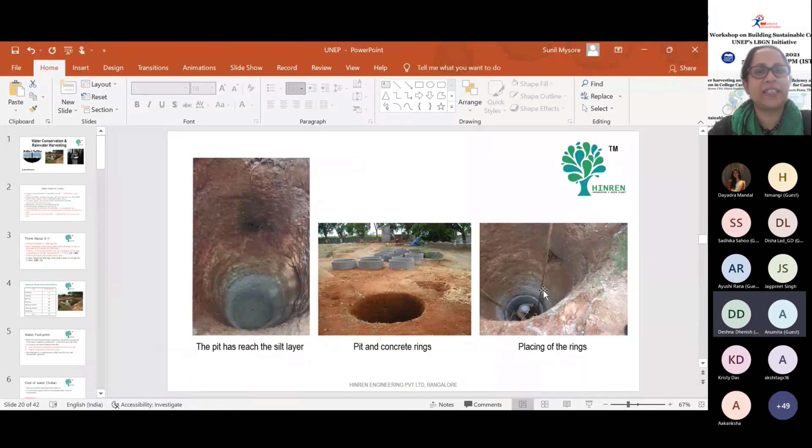So bear with me till I share the presentation. I don't know how this works, but yeah, are you able to see my screen? Are you able to see my screen? Yes, yes, we are able to see it.

Okay, thank you. So I was given the topic of rainwater harvesting and water conservation. Well, they're actually two very different topics. So let me see how I can merge them, because with rainwater harvesting we are talking mostly from the supply side, how we can augment the supply of water. But it is not enough to just talk about the supply. Most important in today's scenario is actually the demand.

How we can become more efficient, how we can conserve water, what we can do to use less water, what we can do predominantly to consume less, because there is inherent water in everything we consume. So we will talk about both in the given space, and after this, any questions or topics we can discuss further, we will definitely do it. So we will talk on both water conservation and rainwater harvesting.

So we will now see why exactly we will talk about these two things. We have to first understand the scenario. If you are talking about 25 years back, rainwater harvesting as a term was not this popular. We used to have some terminologies here and there, but this whole narrative about rainwater harvesting wasn't there 20-25 years back. So what we have done in the last 25 years is most important.

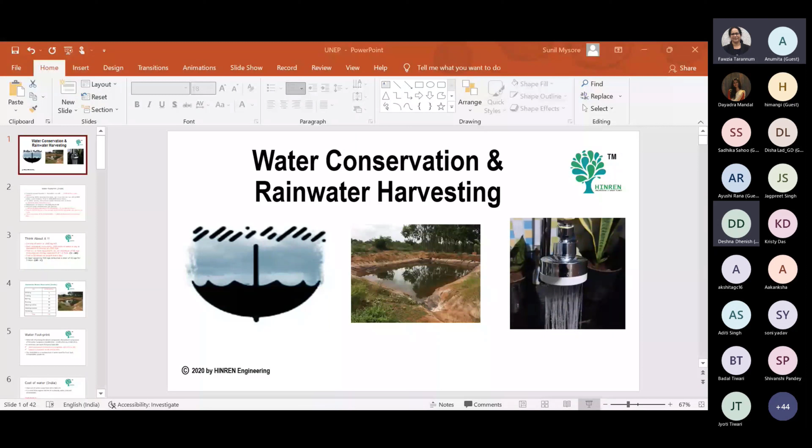So if you have a population of 1.3... Sunil, are you changing your slides? Because we are not able to see. No, I'm not changing. It's still here. I'll request you to put it on slideshow. It is in slideshow, right? To us, it's not showing slideshow. For me, it's full screen. It's visible, so you may continue. Is there any other way of sharing? Just on your toolbar, see slideshow. Oh, I think I just lost it. It's gone. Entire screen. How about now? Yes, it is visible. It's perfect now. Good. Thank you.

So I was talking about the net endowment of water that we get in the country. It is pretty much the same from the time we started recording data. So if we crystallize this further, what can each person in the country get? If you divide it for academic interest, we are getting 1,600 billion cubic meters, out of which 50% goes to the seas. What translates is about 6,15,300 liters of water endowment per person. Per day, divided by 365, everybody in India can technically get 1,600 liters of water.

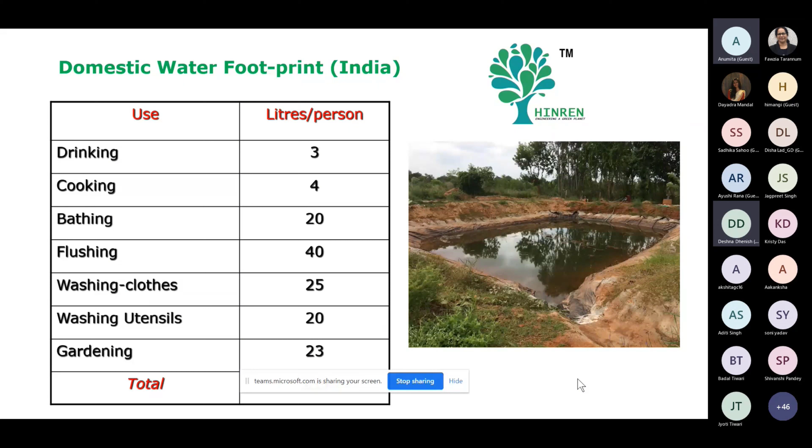So the point I wanted to make here is that the 135 liters we consume every day is hardly about 8, 9, 10% of our total water consumption. Of course, we have to conserve here as well. Plus, we have to largely conserve on our indirect water consumption, like our consumption pattern, food, travel, and other conspicuous consumption we are involved in. There are really two things. Rainwater harvesting is one. Water conservation is completely different. Though they are connected, conservation plays a very important role. Water conservation is not just switching off the tap, but changing to a more sustainable kind of consumption.

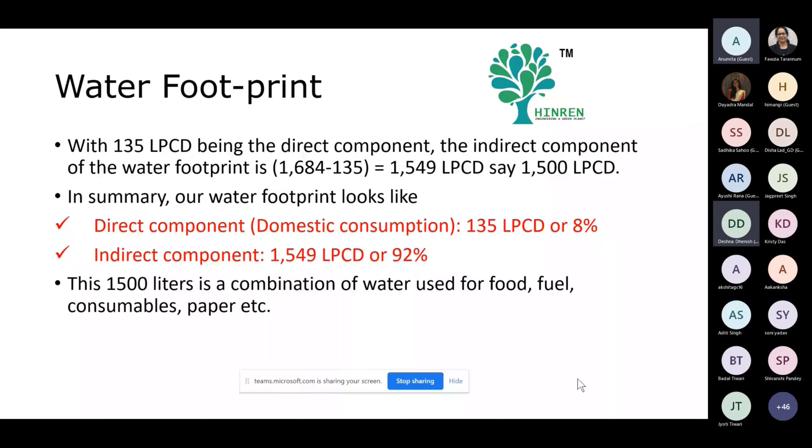I don't want to go more into water because all of us know what the cost of water is. The water in India is extremely subsidized. Most people don't even earn as much as the cost of water is. If you take it at 126 rupees, so many people don't even earn 126 rupees. So the water we get from municipal supply is heavily subsidized. It's far lower than the true cost of water.

So again, we come back to the two definitions, rainwater harvesting and water conservation. Rainwater harvesting is largely a supply side issue. We are trying to augment the supply, to catch the water which falls on the roof and divert it into rain barrels, underground tanks or recharge structures. Water conservation, again, you can divide into two parts. One is switching to far more efficient water consumption in households, using aerators, better taps, better showers and water efficient devices. That is for our conspicuous 135 liters consumption.

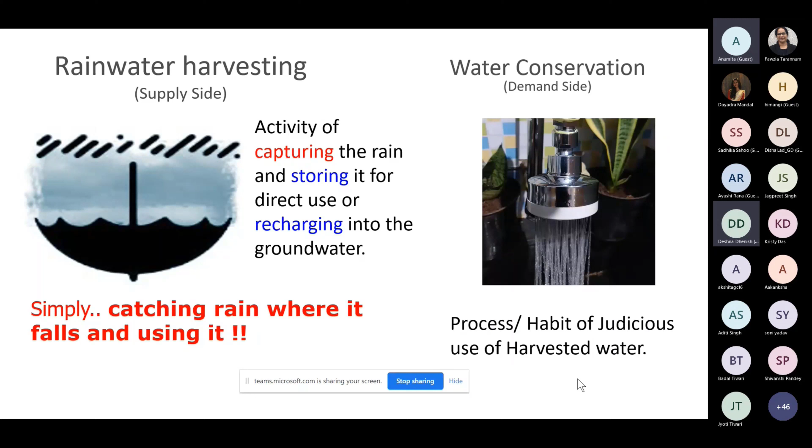The second part of water conservation is a change in lifestyle itself, converting to a more sustainable, less energy consuming lifestyle, like biking or using less paper and so on. We can talk a lot about it; we can have a separate session on sustainable lifestyles. So these are the two points I wanted to make. Now we will come to rainwater harvesting per se. Why do we talk about decentralization?

All of us people staying in Delhi will know water is coming from about 30-40 kilometers away from the Jamuna basin. People in Bangalore will know we are getting Kaveri, which is easily 120 kilometers away and 500 meters deep. So there's so much conveyance, so much energy used in conveying the water, so much wear and tear of the pipe, so much infrastructure required, so much land required in conveying the water. So decentralization is one of the mantras.

So I've just given you a case study for the city of Bangalore, a city of 710 square kilometers receiving about 950 mm. This year we have crossed 1100 mm, by the way, and still counting. It rained yesterday. Even December 15th, we had rain in Bangalore. So total runoff, even assuming 50% goes, it's such a big number. With a population of a little more than 1 crore, 208 days of the water requirement of the city of Bangalore can be met by just the rainwater falling on the city. You don't have to go beyond that.

See, people coming from Bangalore or southern India will know there's a big history to Bangalore's water. We went going far, now we are at 120 kilometers, and now we are talking about the next source of water, the river Sharavati, which is 300 kilometers away. So a good part of the city's demand can be met by rainwater. This is the point I wanted to stress.

See, our city planners are mostly concerned about the water falling far away. It's falling in Kodagu or Coorg, which is 300 kilometers away. That is the catchment area for the city of Bangalore. We are not addressing the catchment of the city itself. So the city itself can give you a large portion of the water.

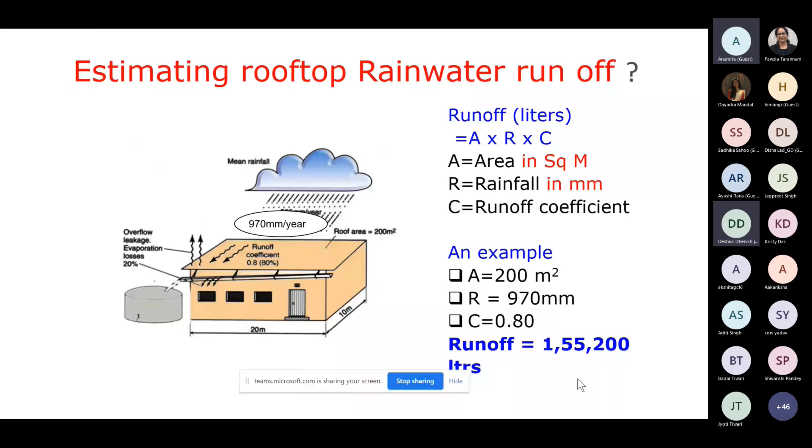Okay, so I happened to see this green nudges document which was shared with me. So I have also shared my own nudges. I have been writing about this, what are the small initiatives that one can do to actually make your life more and more sustainable. It's a 3-part series. I've actually completed 2 parts. The 3rd part is pending. So these are the links.

You can read through the very, very small nudges, like what can be done, like painting the roof white, changing your water tap to a low flow water tap, and shunning away the RO. So there are small nudges that one can actually implement to become a little more sustainable than how you are. So it has to be a step-by-step process. You can't just say, okay, at once I'll start and do this or do that.

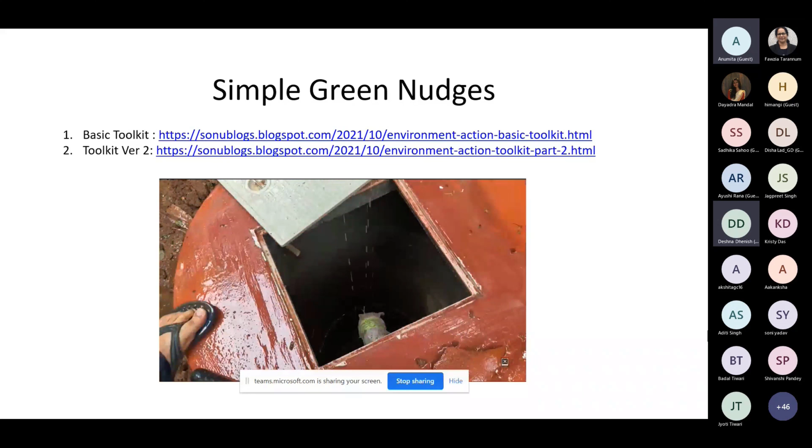You can see this is the rainwater being harvested, getting right into our underground sump. In case the water overflows from the tank, that goes into this recharge well and augments the groundwater. We can also open the first rain separator so that the first rain water also gets into this well. I'll just show it to you now.

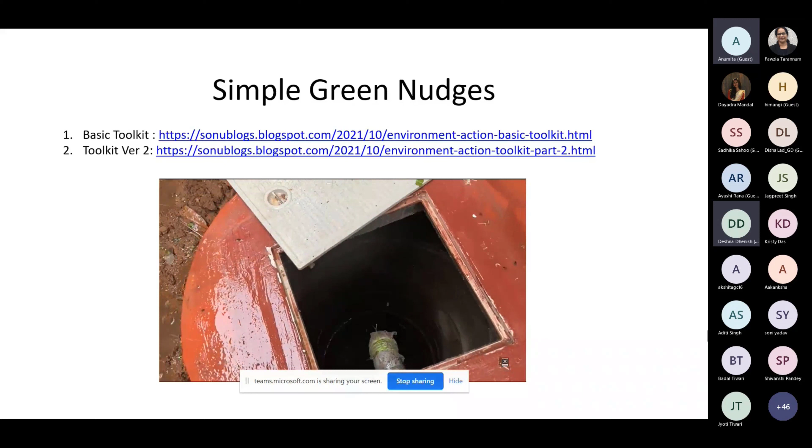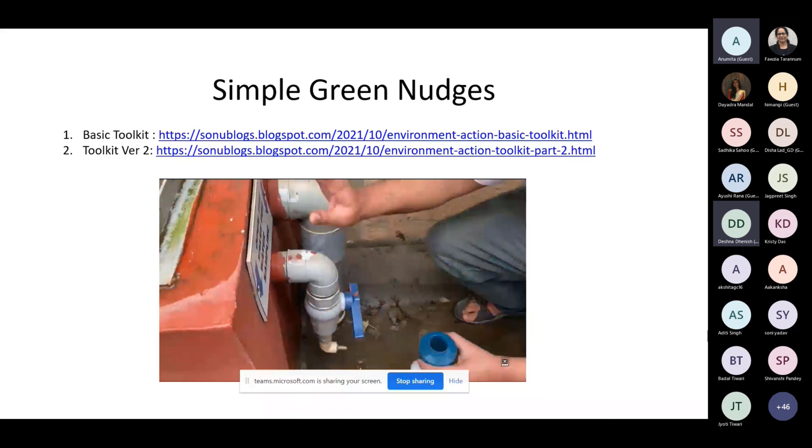Now the rains have stopped. This is the filter. Some water is standing here. So this is a valve. This is given to sample the water. If I open this valve, I can collect the water for sampling. So this is the rainwater filtered water. I can collect the water from this valve and send the water for testing. This is an upflow filter. There is some water standing here, and we will show another valve here.

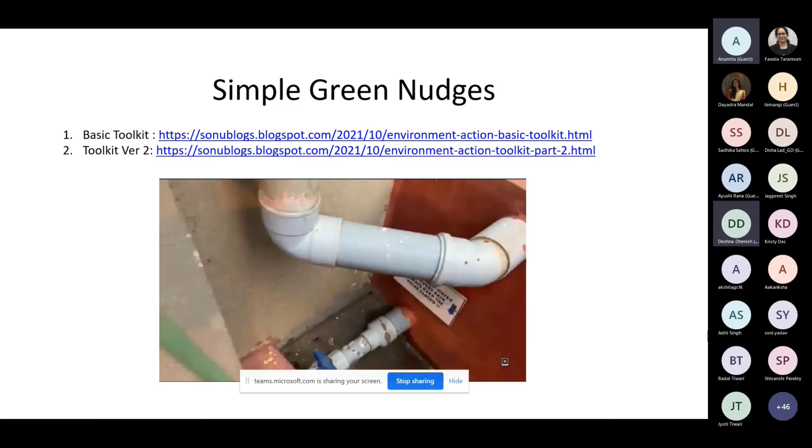This is another valve on this side. So here, this valve, if we open this valve, is going to backwash the filter. So after every rain, this can be opened, and the water standing in the filter will automatically backwash all the filter media, and the water will go out. This water we can use for floor swabbing or floor cleaning or any other non-potable use.

You can come here and see this is the water standing here. Now I will open the valve. You can observe what happens. See, now I have opened the valve. So this is the water getting backwashed. You can come here and have a look. Now all the water is going down from the filter. So all the water now has gone out, and now the filter is empty to receive the next rain.

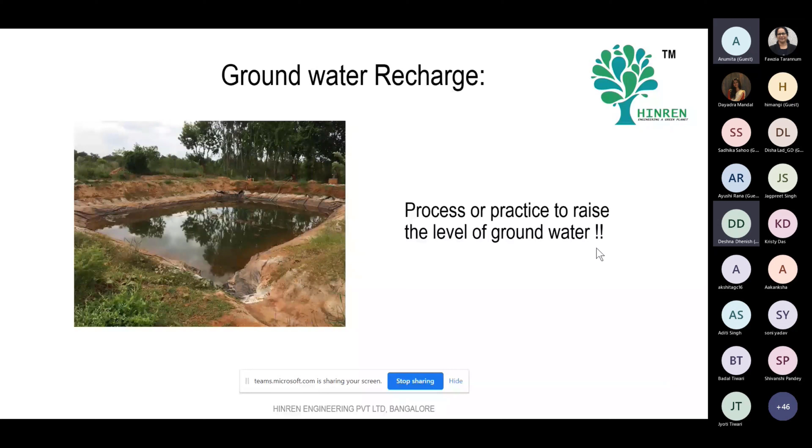For large campuses, for example, if you're talking about 700 acres, 500 acres, mostly it's open areas, either roads or gardens or pavements, where groundwater recharge is actually extremely important. So I will talk a little bit of this groundwater recharge and also talk about the economics. A lot of times, when I am talking to people, customers, academia, they all ask, what is the cost? How much can we save? Is it worth it? Why isn't the government doing it? So let me try to address a few of these as much as I possibly can in the limited time.

So now, as I told you, there are many ways you can do groundwater recharge. Most important, if you consume less, you are actually saving some other part of the groundwater or the fresh water. So plant trees, make trenches, recharge wells, stormwater infiltration wells, lakes, so on and so forth. Other than consuming less, we'll just talk about groundwater recharge in terms of how you make a trench and leave the water inside, and what actually happens after that.

So generally this is the geology in Bangalore or most of the Deccan Plateau. Mostly what we are doing is we put borewells and try to extract water from very deep strata. Generally in Bangalore, yesterday I saw a borewell of 1,700 feet. More than 1,000 has become very, very common. So this is a very approximate and very generalistic geology I've tried to draw.

But our point of interest is this: before 1967, there was no concept of borewell. The UNICEF guys got this borewell to India for a very short duration of time. They said this can give you water in certain parts, go deeper and get the water. But now the borewell and this borewell machine became a way of life. Now everywhere you see borewell machines.

So 40 years back, nobody had heard of a term called borewell. It was very, very rare. Mostly people used to think about a recharge well or a withdrawal well, which is not more than 30, 40 feet deep. So essentially what I'm trying to tell you is, you can look at these as perhaps a withdrawal well. If not, you can look at it as a recharge well as well.

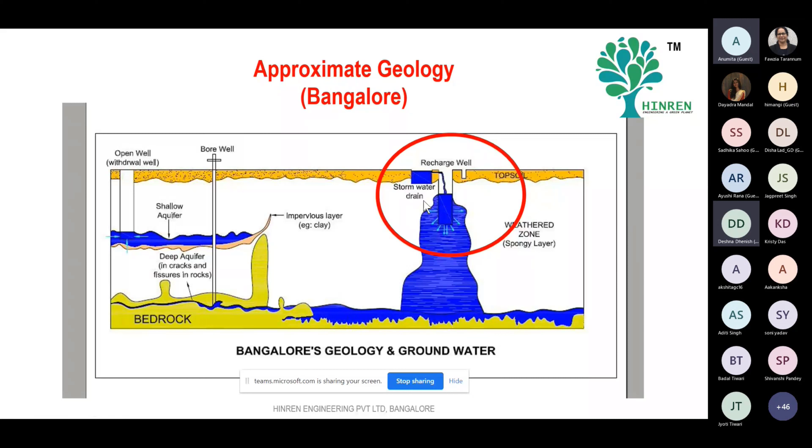Okay, so this is the approximate geology I wanted to talk about, so that you get an idea of where you can actually source or even where you can put the water for future use. So a small technical detail. See, this is roughly our earth surface, and we have a recharge well or a withdrawal well. This is our surface, and we are sinking a small cavity here.

So most of the water we see in the traditional open wells, people in Delhi, the older folks may appreciate, there was this Agrasen Ki Bawli near Connaught Place, where I was told there was water. The time when I went there, there was no water. I thought it is just an architectural feature for people to come and take selfies, but then I was told up till the 1980s there was water there. I'm talking about this water. It's unconfined water, sweet water, by and large free from any kind of contamination.

And that area of influence is so small that any recharge here can actually make this water yield here. Compare that with the confined aquifer, which is between two confining layers. Generally, this will be shale or clay or quartz, some kind of geological formation, and the water will be here, under pressure. So when you're drawing water, the water will come under pressure, but you're also talking about a lot of other chemical contamination which can come with that, and which also needs a very high inherent energy to actually suck that water.

And mostly the recharge area or the source of this water will be very, very far from the point where we actually extract this water. So there are two real kinds of structure. The recharge or withdrawal structure we are talking about is very shallow, 20, 30, 40 feet, and the confined aquifer or the deep borewell, which mostly in the Deccan Plateau has crossed 1,000 feet now.

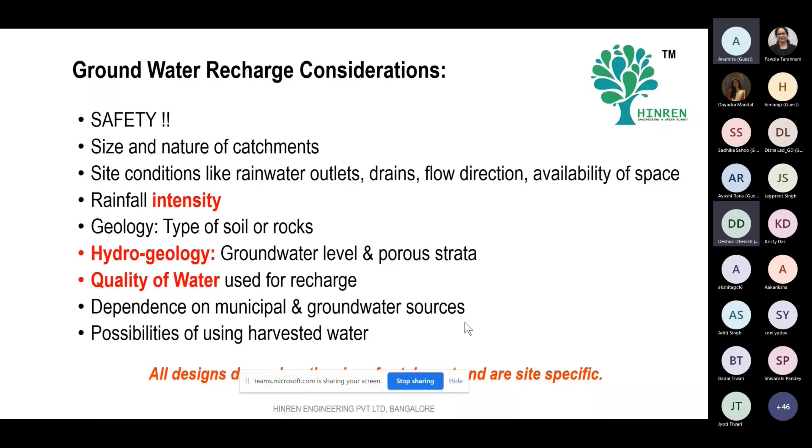Okay, so I'll not get into the hydrogeology and other engineering considerations, but what I wanted to tell is these are the structures which can be used for putting the water back into the soil. So a little bit of technical stuff. Essentially, it's just an open cavity. They're using the hydrostatic pressure, mostly governed by the depth or the height, which makes the water go into the soil layers and augment the groundwater.

So you can pick up any kind of water, rooftop, roads, parks, catchments, put it through a very small basic filtration for only sediments, plastic and any kind of physical contamination, and put the water here. The earth is the best kind of filter. You can use it to push the water inside the earth, and after some time you can use the same well to take the water outside. I am talking about a traditional open well.

You know, if you come to Kerala, even, there was this very famous Gurudwara in Delhi, Bangla Sahib, where the water was so sweet even up till 2000, 2004, 2005. Only after the metro came up, the sewage started contaminating the well, and now it's closed. What I'm trying to tell you is these wells, if not as withdrawal wells, can be used for putting the water back into them.

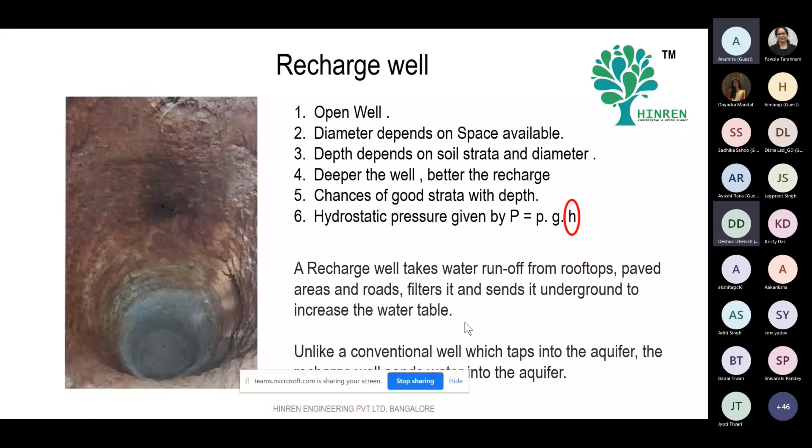If you don't have one such well, you can actually make it. It's not such a big deal. Making this kind of a well is about a 2 days affair. Okay, so this is a typical cross section of how the well looks.

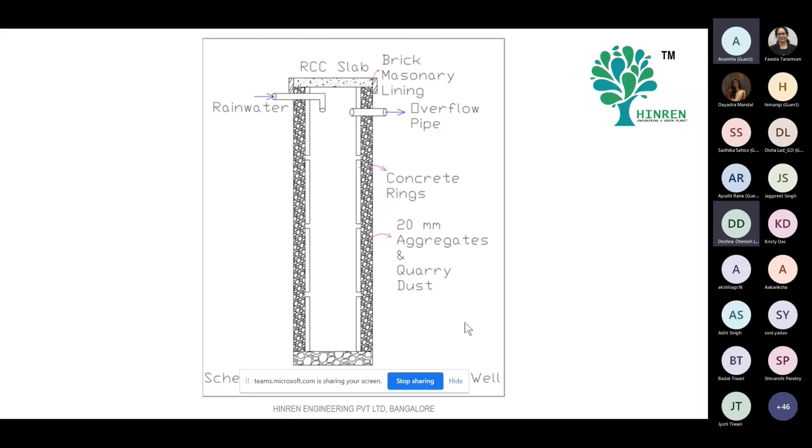These are extremely easy to do in large campuses. I have done hundreds of them in engineering colleges, in spiritual institutions, and these have worked wonders. These are deeper. So if you don't have space to go broader, you just go deeper and put the water. Because of hydrostatic pressure, this actually makes your soil like a sponge. And at some point of time, you can withdraw the water back.

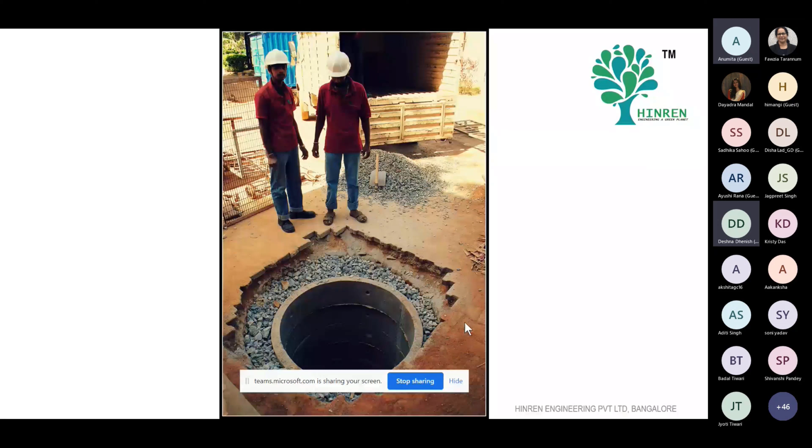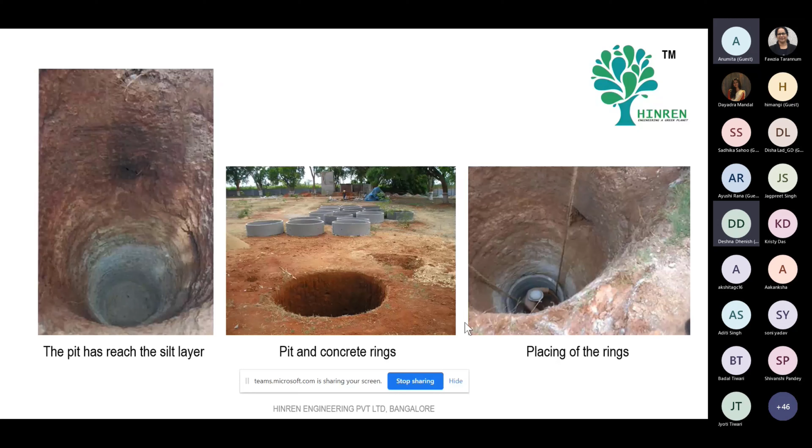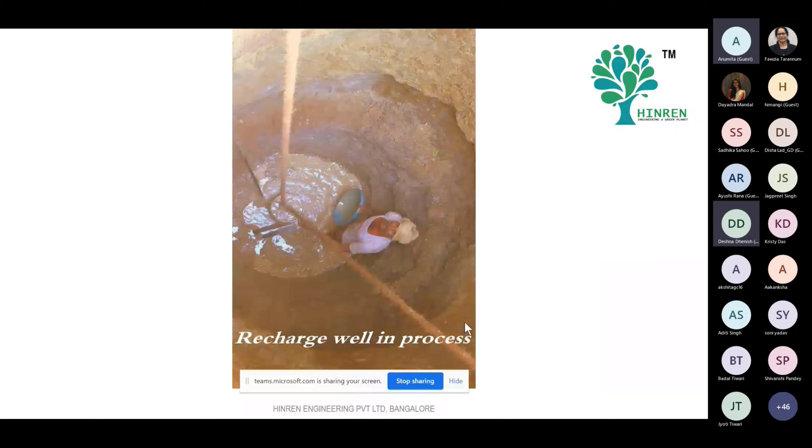See, this is the beauty. See, now you've got water. You've got water at 7 feet in this well. Even while doing it, we got water. See, again, this is water here. Water in the well. See, water is available.

In the next few days, I'll share one more video where bore wells are not getting water, but the recharge well just 10 feet away from that is actually getting you water. I'm just waiting for test reports. But the moment it comes, I'll publish it and maybe I'll share the data with you.

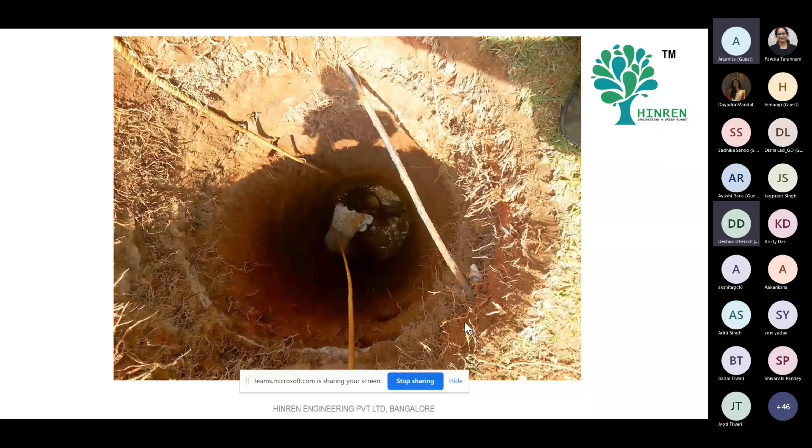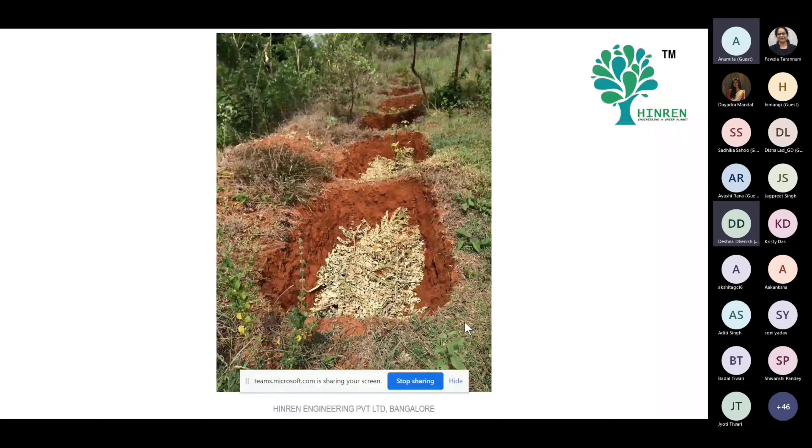So again, this is another well. Even before the rings are placed, you are getting water back. There's water here. These are pre-filters. You can make trenches if you don't have space for even wells. The idea is to just make the water stand and soak into the earth. These are different kinds. This, by the way, is an agricultural institute in Bangalore. Again, agricultural institute in Bangalore, where the water is actually drawn. What you see is about 10 feet deep.

So I'll not go more into details of the economics, but very simply put, if I am taking water from a 20 feet deep well, what is it going to cost me? People who have got an economic bent of mind, this is for them. Suppose I want to pump the water 40 feet from my well to the rooftop, how much am I going to spend? So 40 feet of pumping at roughly 1500 liters per hour, if I use a 0.5 HP, is going to consume roughly 0.4 units of energy.

0.5 HP into 1 hour is 0.38 kilowatt into 1 hour. That is 0.38 units of energy. So to pump 1500 liters, I'm only using 0.4, or 0.38 to be precise. So what does it make in terms of energy cost? If I multiply by 5, in most places it's even less than 5. In Delhi, the first 200 units are free. So you're paying 1.9 rupees for 1500 liters. Or in kiloliters, it's 1.26. So for only about 1.5 rupees, I can get 1000 liters of fresh sweet water.

This is the cost. The municipality can charge you anywhere between 5 to 25 rupees per kiloliter. The tanker cost in most parts of India has crossed 100 rupees a kiloliter, and the quality is not guaranteed. But look at this, a recharge well in your house or in your complex or wherever it is. If you are getting water from there, you are getting perhaps the sweetest and best quality of water at the cheapest possible price.

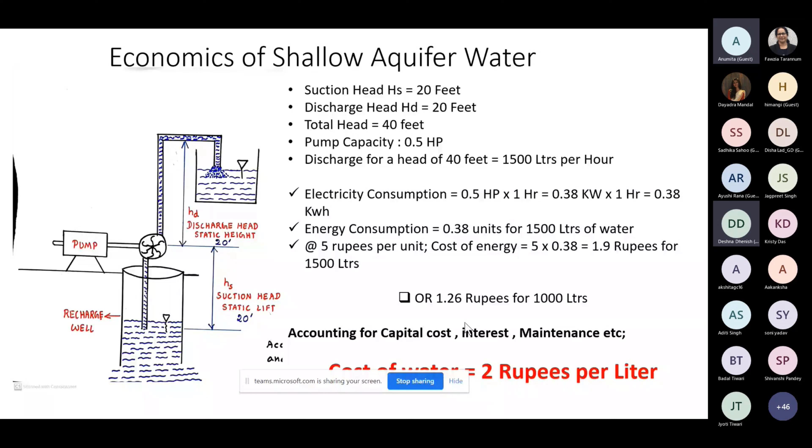If you look at the true cost of water, even the government water supply boards are spending anywhere between 30 to 40 rupees per kiloliter just to get it to your tap. They're subsidizing it almost about 50-60% to actually give you the water at this cost. And tanker cost, it's ever increasing. Every time there's a diesel price increase, tanker prices increase. Quality is not guaranteed. And in most parts of India, it's well over 100 rupees per kiloliter.

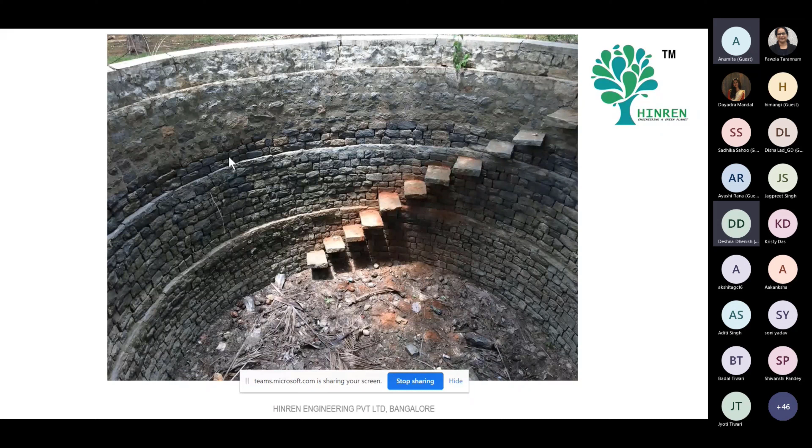So even from the economic point of view, using rainwater as locally as possible is an extremely lucrative investment. And of course, quality is guaranteed. But of course, we end up doing something like this. It's unfortunate, but the idea of sharing this is, even though the old wells are there, we fail to recognize their value and try to use them as dump yards.

Okay, so I generally conclude by saying, there's a lot of jargon around rainwater harvesting, a lot of jargon around water harvesting, etc. The problem is most things are extremely simple to do, but we are caught up in this jargon, and there's a lot of so-called innovation and seminars and conferences that we actually miss small implementable nudges, and we end up only glorifying stuff and not actually doing anything else.

So this is a very popular saying by economists: you start refuting false dogmas first, and knowledge is not just repeating known things. So you refute the false dogmas, get on to your basics, and things will be far better. Okay, so from an engineering point of view, I'm not talking much, but if you want to talk about rainwater harvesting as a practice, in my opinion, what is required now is skill dissemination, knowledge dissemination, we need people to understand. More than understand, we need people to appreciate it.

Things like this can work. Things like this are doable. Things like this are far more efficient. When people can appreciate, they'll definitely learn. Once they learn, the engineering comes about. So the idea is, first we need to have a social acceptance. We need people to appreciate these things.

I'm not at all talking about technology. There's nothing to do with technology here. It's extremely simple. Put a bucket when the water is falling, that's rainwater harvesting. Constructing a dam is rainwater harvesting. See, technology is secondary. First is the intention to do something. Second is appreciation, like how it has to be done.

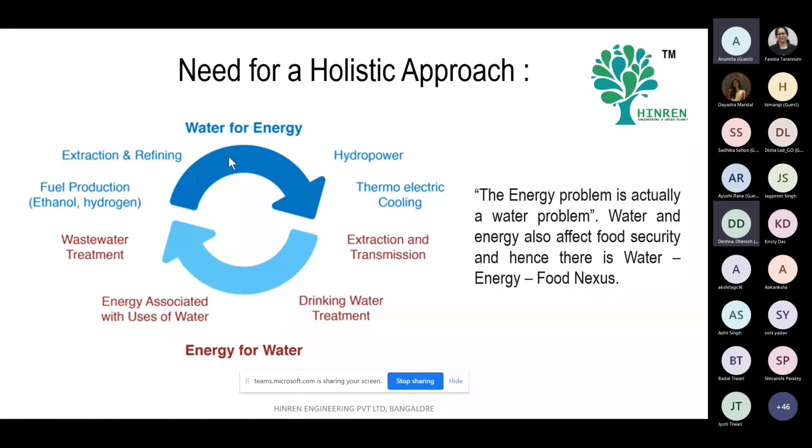Okay, see, look at this. Same thing I'm trying to illustrate here. See, if you use water to irrigate crops, it can promote food production, at the same time reduce your electricity, because your hydro potential is compromised. If you use bioenergy crops, it will take a fair amount of water, and you are producing energy, food for energy, and you are compromising on food security.

So if you take high energy pressurized irrigation, perhaps you are giving more water, but at the same time using more energy. So it's all jinxed. At the universal level, this is actually very, very jinxed. So we need to have an innovative hybrid decentralized approach to actually de-jinx the entire thing. Okay, that is a way forward in my opinion.

Okay, so closing remarks, what I would say is most important is consume less. If you're unable to consume less, consume efficiently. Just don't waste, because there is a lot of water in that. The amount of packaging that we throw every day, the amount of plastics we throw every day, the amount of food we waste, it's criminal.

So we have to consume less, or if our lifestyle doesn't permit us to consume less, at least consume sustainably, consume efficiently, consume water positive products, so that the net impact on the community or the climate is far lesser. And second thing, I don't want to overstress, but one of the best ways to conserve water is to plant trees, plant more trees. Trees can actually attract water, hold water, give you water when you require.